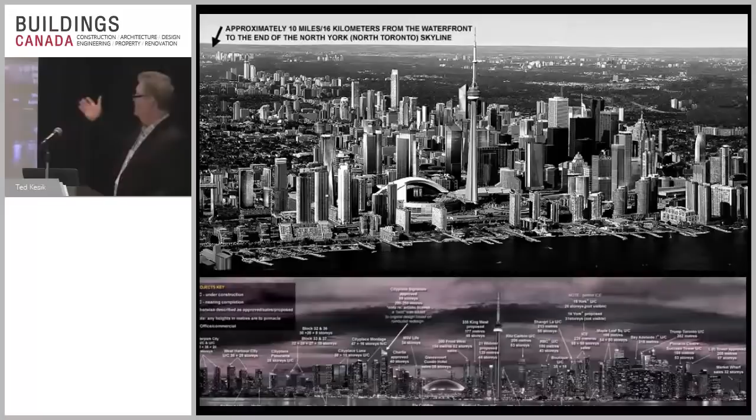Well, you know, this is Toronto, and it's starting to look like condo land. Last time I checked, about a week ago, we had officially 168 cranes on the horizon in the GTA—168 cranes, we're really, really going. You can see there's all kinds of action going on, and there's a corridor where all the activity is occurring: along the lake shore and Lake Ontario, then all the way up to North York, sort of following Yonge Street and the subway line. That's where all kinds of buildings are being built.

There's an image down below, probably not that clear, but it gives you an idea. There's a whole bunch of things that are going to change, because even more stuff is going to get jammed in there, to the point where there won't be any daylight penetration from one place to another. It won't even matter that you have a glass condo because you'll be shadowed all the time. They discovered the same phenomenon in Hong Kong—they ended up saying, gee, nice building, too bad we don't have a view except of another building, and too bad we don't get any sunlight in here. But other than that, it's okay. So somehow they say it's okay to do this, and it's desirable, and we'll see.

I don't think I will, because I don't think most of us—well, some of you in the room will live long enough to see this—but it'll take about 30 or 40 years for the chickens to come home to roost completely. Then we'll discover whether it was a good thing or not.

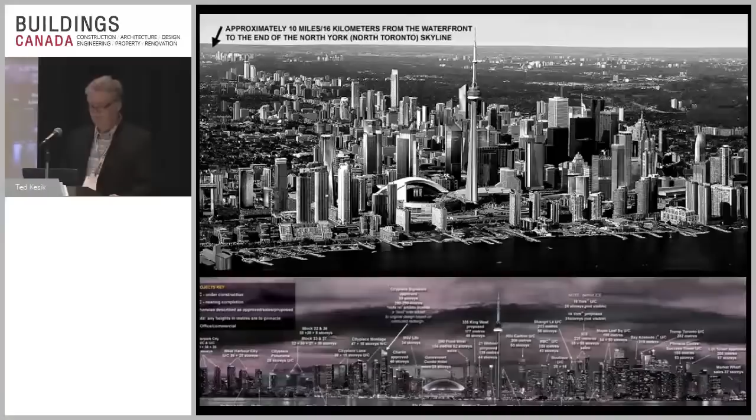So these condominium buildings come in all shapes and forms, and they have different market sectors, and those sectors change. At the high end, buildings tend to be more mid-rise, with punched windows and solid walls, because they're selling expensive units to people with a lot of money. When you sell to people with money, they can afford good lawyers, so you have to be careful what you sell them. You don't have to worry about that when selling to someone who barely scraped together a 10% down payment on a $300,000 condo. They have no money left for even a Subway sandwich, never mind a lawyer.

So there's a difference, and they go to the low end of the common denominator. If you're building a swank glass condo tower, you'd go with a high-end curtain wall system, but 99% of the time you're going to go with a window wall system instead. Window wall systems are actually at the bottom of the pile when it comes to performance and quality. That's just something to understand about what's happening in the Toronto market, in case you're not familiar.

Why glass facade condos? Everybody always asks me that question because I've been studying these things probably more than anybody from a certain perspective. So what's the scoop? I think this picture takes a sort of quasi-humorous perspective on why.

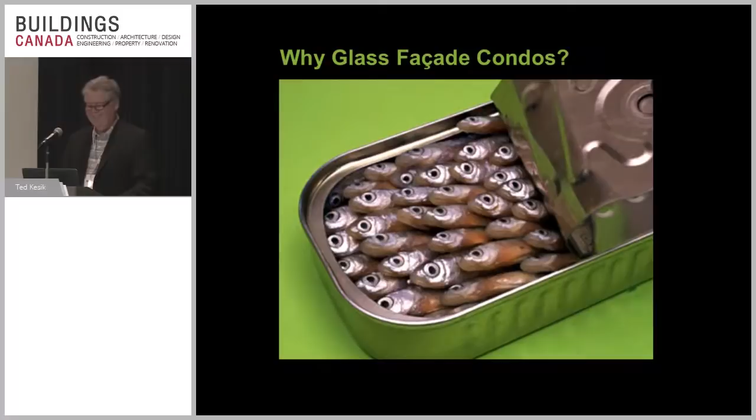Let me tell you some of the things, okay? It's called Condonomics 101, just so you know. This is stuff I've studied because I've been researching housing since I was a graduate student in the 90s, so it's been a long time. But there's interesting things a lot of people don't know. The average size of apartments in Toronto has decreased by about a third since the 1960s.

They're small now. In an old building built in the 1960s, when I was a graduate student and came to Toronto, I rented a one-bedroom apartment. It was 950 square feet, one bedroom. I couldn't furnish it, I didn't have enough money. It took me two years to furnish that thing, mostly from junk I was picking up off the curb. It was giant, I'm telling you, I could almost play tennis in the living room. They've been shrinking ever since, just so you know.

Condominium apartment sizes have been steadily decreasing since the 1990s. When they first came out with condos in the late 70s, early 80s in Toronto, they were actually high-end apartment buildings, and they were big, because developers were worried they wouldn't sell unless they made them big, with three bedrooms, extra space, and lots of closets. Well, they discovered after that they could get away with a lot of stuff.

The floor-to-ceiling glass enhances the perception of spaciousness and daylighting. So when you have small apartments and have to give them the look of being big, the glass helps, because when you're viewing it, you come in to look and go, oh, look at that. It's one of those things, it's the old trick that's been played.

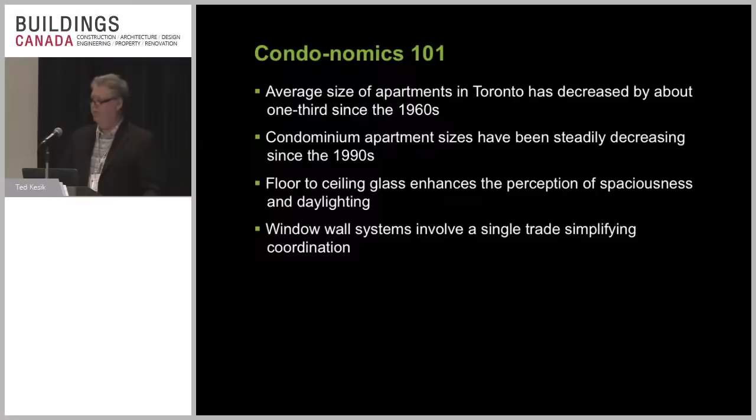Window wall systems involve a single trade, simplifying coordination. Imagine that, you have one throat to choke if you're the developer. You hire this guy and say, you're doing the whole enclosure. He says, you mean you want this whole thing done in my crappy window wall system? And you say, yeah, that's what I want, and cheap too, and fast, really fast. And he says, okay, I'll do it. And you have no competition, no other trade's going to get in your way, it's all yours, you just start and go. So now you understand why they picked the system, eh?

Window walls cost much less than curtain walls or punched window systems. It's true, curtain walls are engineered systems. Punched windows mean you have to have some kind of solid wall, which means you have to use a mason or precast, involving other trades, and coordination costs more money. So again, that's the other thing.

And then the developer, under the rules in Ontario, Tarion, only has to warranty window walls against water leakage for 2 years. Imagine getting a warranty for only 2 years on your enclosure against water leakage. That's the strong teeth that Tarion has on warranties in the province of Ontario. That's the protection they're giving consumers, a whole 2 years against water leakage. Like, wow, you know what I mean?

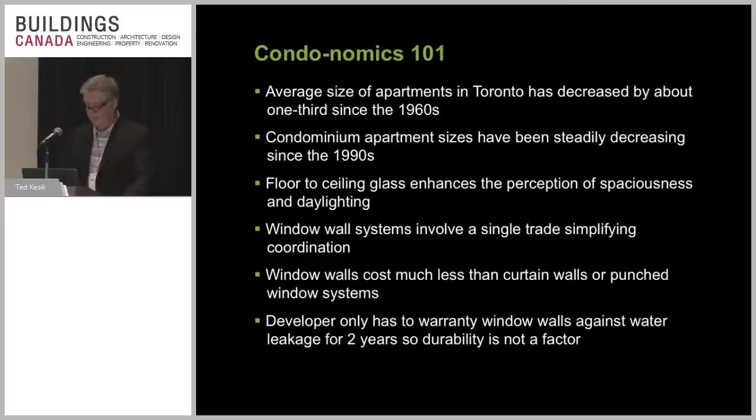That's like saying to somebody, listen, that pair of socks I'm selling you—if between the first day you put them on and the first day you launder them they happen to wear out and you get a hole, they're not warranted. Sorry, that's all the time we're giving you on those socks. One wearing and that's it, you throw them out, okay? So we're giving you that kind of level of protection. A lot of people don't want to hear this stuff, but I tell them it's for your own good.

Now, the MURB formula has been going on forever, okay? My good friends at RDH Engineering in BC, we've always talked about this because I've studied these things and they've studied these things, and it's the same old formula. I just have to explain what the MURB formula works like.

Basically, we've been building these things the same since the late 1950s. The technology fundamentally has not changed. You've got a building with a corridor down the middle—what they call a double-loaded corridor, with doors on each side. The suites are on one side or the other. There's no cross-ventilation and no daylight penetration from the other side unless you have a corner suite. Do you understand what I'm talking about?

You pump fresh air into the hallway and hope—you draw arrows of hope—that the air will find its way underneath the space of the door connecting the suite to the hallway. That is your fresh air supply. And you have this continuous exhaust fan in the bathroom sucking air out. Unfortunately, most of the air isn't coming from the hallway—it's coming through the building enclosure because it's so leaky, because it's a cheap window wall system. So it's not working the way the drawings show.

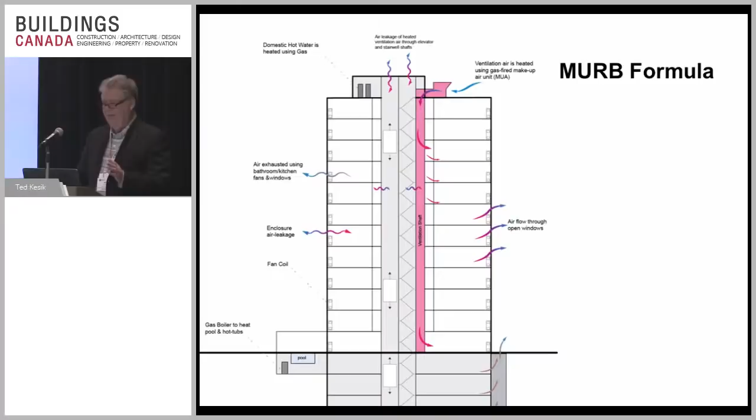You pay all that money for a building permit and nobody requires that you measure them. So this is the thing we've been building forever. They're made out of concrete, and fortunately not much happens in the way of fires, so that's good—but it's bad. I mean, bad is really a mild term.

So the way these things work: you've got double-loaded corridors with poor daylighting and natural ventilation. Shear walls act as demising walls, so there's no adaptability. The cheapest way to build these things is to just use all the walls that separate the suites as your shear walls, because that way you have a cheap structure—basically like a bunch of orange crates all put together in reinforced concrete. But at the same time, you can't move these walls. If you had a column-and-capital old-style building, you'd have a block wall in between the suites.

Well, heaven forbid—if I'm only selling this condo for $550 to $600 a square foot, I can't afford to have a mason put a block wall in between two suites. No, that's way too much money, I'm not making enough money. Okay, fine, so don't do it that way. Then that means everything you see is the way it is, unless you want to get x-rays of the rebar in the shear wall to see, can I cut through, can I make it? The adaptability issues are insane. But it's the cheapest way to form and pour because it's the same cookie-cutter floor after floor after floor.

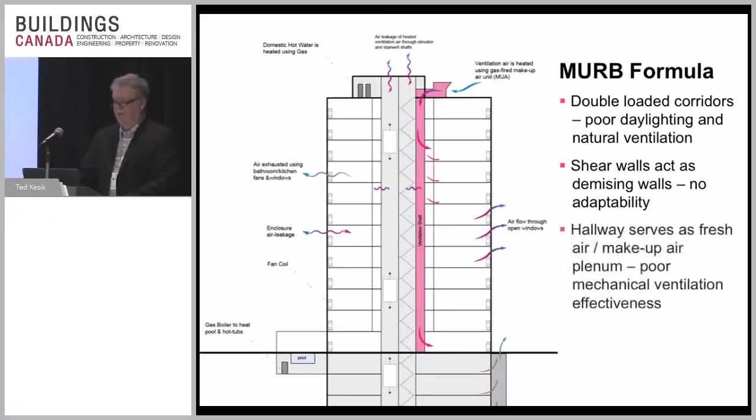Hallway serves as fresh air, makeup air, plenum - poor mechanical ventilation effectiveness, for sure. People constantly complain of indoor air quality problems. Inefficient enclosure with projecting balcony slabs means poor thermal comfort and resilience. And that's the real issue, because that's what happens. So now you've got all of these issues coming together, and it's not so good.

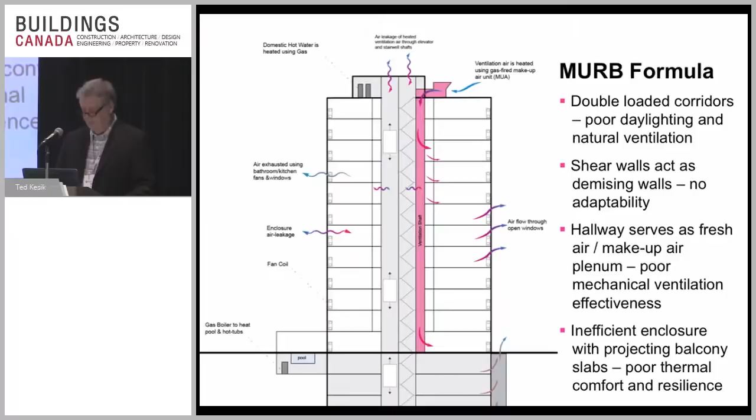So if you want to know why condonomics 101 works, I still think this sort of says it all: follow the money. That's this guy's line on Murdoch Mysteries - follow the money. It's the cheapest thing you can get away with, the most minimum of minimums. It's like someone who asks what's the passing grade, and they go, you need 50% to pass, and they get 50.01%, and they say, that's it. You sit there and think, you're going to be my brain surgeon with 50.01%? I'm really excited. Okay, so let's talk about glass condo performance problems.

Durability, of course, is huge. Water and air leakage problems are widely reported, and we already know - there's things I can't even talk about because my colleagues tell me I'd be violating client privilege, and there's people suing people, it's crazy already. And these buildings, in some cases, haven't even hit the 5-year mark. So there's deterioration of interior finishes, propagation of mold - not good.

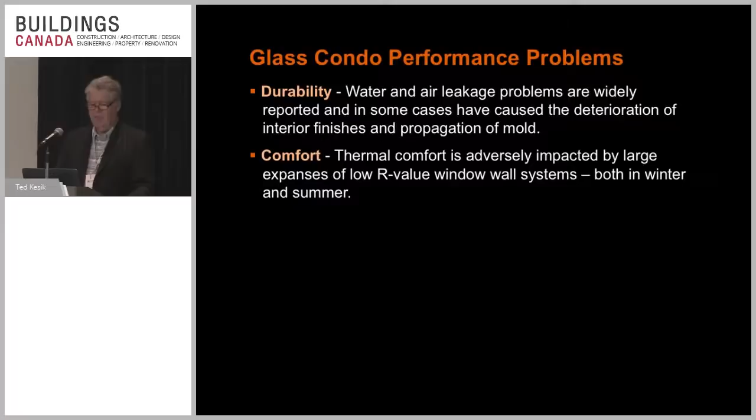Comfort - people have a really hard time gaining comfort in many of the suites, both in winter and summer. In winter, too cold - you're looking at an R2 enclosure. An R2 enclosure is like being inside of two cardboard boxes as a street person. I'm serious, I always tell people, do the calculation. It's R2 - that's between you and the outside world.

Toronto, February, minus 30, R2, and you've got this conductive slab going across the building - you can put a case of beer on it and pre-chill it. And people say, why don't you just put it out on the balcony? You say, because if you fall asleep watching the Leafs, the beer might freeze, and then you've lost on two counts. So you've got to understand.

I have this sense of humor because I was one of those people that was fortunate - I grew up in the cultural metropolis of Sudbury, Ontario, and we saw hockey through a different lens, and beer especially.

So the comfort issue is huge. In summertime, you just can't maintain comfort either, because the glass expanses are too big for the cooling. They put the same fan coil unit in every suite - it's one of those things, you get the same as everybody else, you know what I mean?

But sometimes you have a corner suite that's got a lot of glass, facing west. They don't - people say, what's going on, I'm just running this thing 24/7, it's hot in here. This is common. I know I've talked to people who have rented these, and they always said, boy am I glad I just rented this place for a few months while figuring out where to live in Toronto, because I would never ever buy this thing - it's just a disaster.

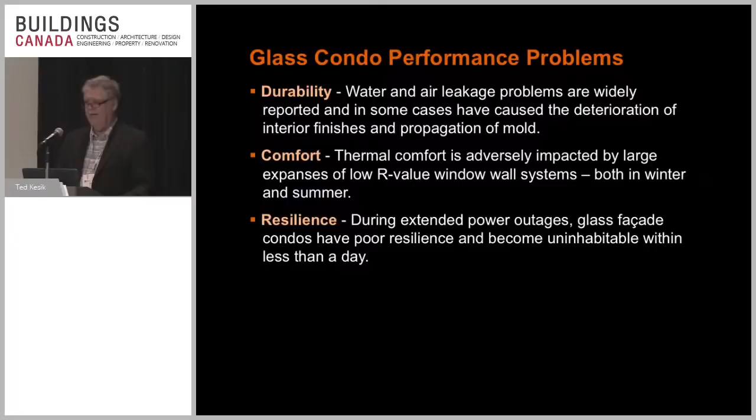Window wall enclosures are prone to leaks.

It's true. This is a typical example of how these things are put together. You look at this thing, you show this to somebody, say this is how your building is being put together. You look at all the fingerprints, the scratches, the imperfections, the undulation of the concrete, the lack of a good seal. The whole thing is just garbage. For the money you're paying, for that kind of money per square foot, you should get something that performs like a Ferrari. But no, you're getting something that's like a Pinto, a rusty old Pinto.

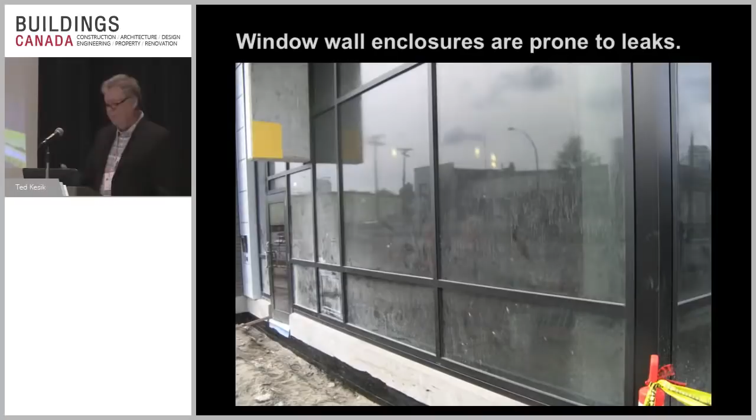These things are bad, they're prone to leaks. They've been known for that forever because they were developed really as a storefront application, one story, not to handle big pressures back and forth. They were never designed for that, and not for huge expanses, endlessly expanding and contracting. They weren't meant for that. But somebody said, you know, we could adapt them for that. It's true, you can. So the workmanship, materials, and installation conditions are imperfect.

In the 1960s, architecture was amongst the top 2 paying professions in Canada. But now they've fallen to the point where I don't know where you stand. Engineers haven't done much better. There's a development industry that's intent on beating the hell out of us and getting us to compete against each other, to the point where we've narrowed our fees down so the only way you're going to make money is if you can trick a guy into giving him the same set of plans twice and invoicing him, and then later he discovers he only built one building. That's about the only way you're going to make money nowadays.

People joke, but I tell them that because a lot of times I have friends, I go to parties, people say, well, you teach in an architecture school. I say, yeah, I do, but I try to warn the students to run while they still can. This is not a business for you, it's different. I always ask, did you marry rich? Some say yes. I say, okay, good, then it'll be a nice hobby. Do you come from a rich family? Some say yes. I say, well, that's good, because then you'll have lots of people you can design for, it'll give you something to do, and you won't turn into an alcoholic popping pills. A lot of rich people fall into these things, they have too much time on their hands. So in that sense, it's very nice, it's like painting, it's like taking a degree, it gives you something to do. But if you're talking about somebody making a viable existence, with a wife and kids, 3 or 4 kids, putting them through university, you're going to have your kids awfully old in life, and it's going to be tough. So I'm just realistic, and it shouldn't be like that because it's different in other parts of the world.

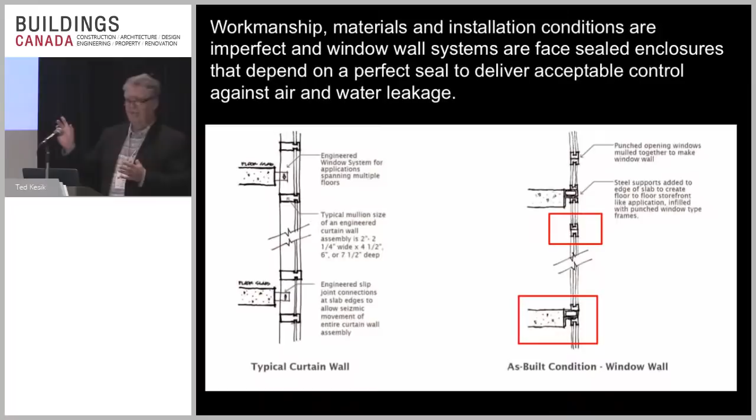So then look at this one on the side. Somebody got the idea to make these things work because they said, well, we'll take the storefront type windows, which are really windows for punched openings, and then we'll mull them together. That's what mullions do, they mull together windows, that's really the thinking. And then they end up putting this little angle affair, which is great for thermal bridging, by the way, at the edge. These are pictures that my students gave me.

I say to my students, if you have any good pictures, bring them in about condo enclosures. And look at that, the frost penetration on the inside, and already mold on it. So this is what we're talking about. And these are supposed to be fairly high standard condos. But why is there so much frost on the inside in Toronto? Because it's a big thermal bridge, that's why.

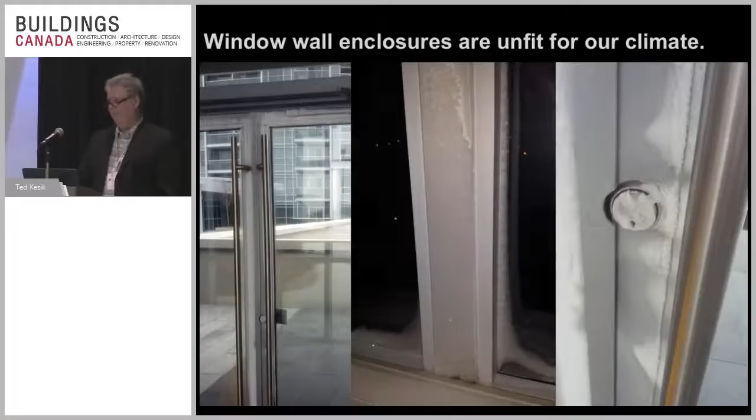Then I have my colleague in Ottawa who is doing a major study. They went to all kinds of new condominiums in the Ottawa area, and they're still in the process of analyzing. He said, I'll just give you some of the findings. He says the condensation problems are huge. He says these people gave us permission to go into their suites, we got to take pictures, we got to document things. So there's so much evidence here, it's to the point where it's sad.

It's sad because, okay fine, I've always made the joke to people that we'll just get good at building condos when we no longer build them anymore, because we'll have filled out all the lots with the crappy ones and there's no land to build on after. So then we'll know how. We'll be wise after the event. I don't know if that's the way to be.

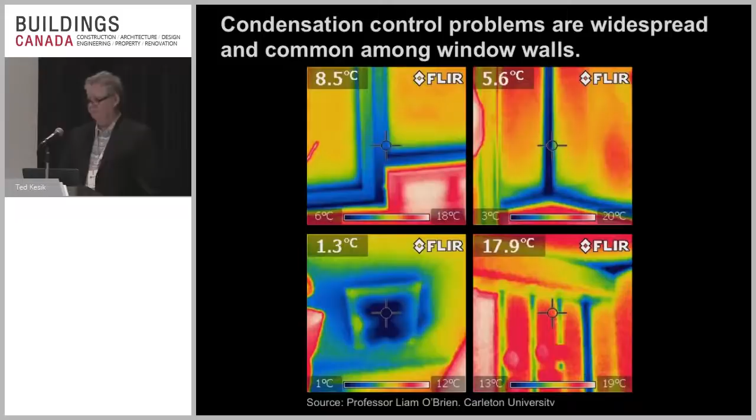And these, none of these are, if you think these have thermal breaks at the detail, I want to see the detail. I want to see it. I want to go there and get some thermography right on that detail in the middle of it, I want to see how it glows. Because I always tell people, just because you call something a thermal break, it doesn't mean that it's a thermal break. Just because you put it, you might as well put on the side of your enclosure details,

'weatherproof, air leakage proof, water leakage proof enclosure assembly.' And it's like, just because you write that, do you think Mother Nature is going to say, oh okay, I won't go in there, I will not leak into your... I'm sorry, I didn't know that, I apologize for being so nasty all these years.

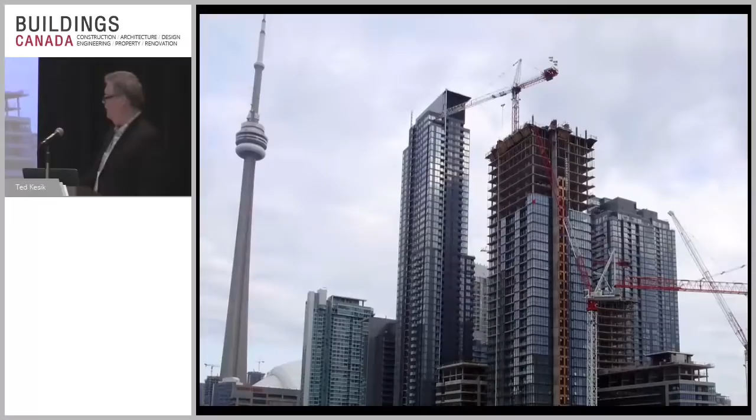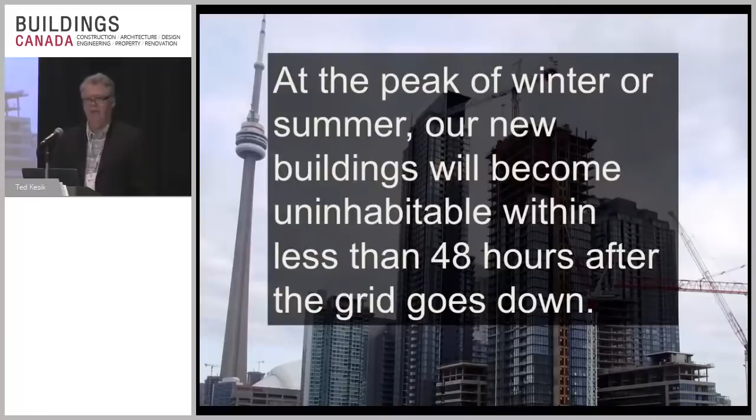Less than 48 hours, you're out. Now, colleagues of mine in New York City, where they have the same issues—it's funny how all this area of the American Northeast, Canadian Great Lakes, same thing, same climate. Look what happens: when you have a high-performance enclosure, you go almost 7 days. This was all stuff that they had monitored and also did some simulation on.

And it's a beautiful piece called 'Baby, It's Cold Inside,' from the Urban Green Council of New York. And there were places, typical buildings, where by the end of day 2 they were already having to leave. People said, I can't stay here, it's too cold, but I don't know where I'm going to go. That's the problem—when you have a city the size of New York, evacuating a city like that or trying to find a place for somebody to stay warm is difficult.

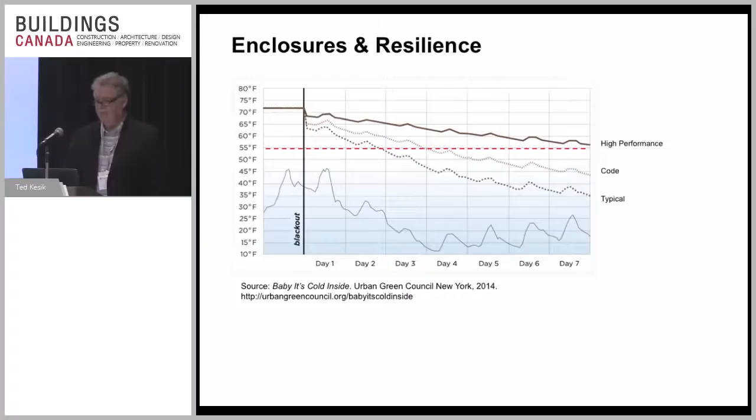It's one thing when you have a town of 500, you got to maybe put 200 or 300 people up here and there. You got 20 million people, what do you do? You know what I mean? It's tough. And so that's a big problem that we have, because climate change is going to make for worse things yet, and our building stock is not resilient. So we need to change the game, obviously.

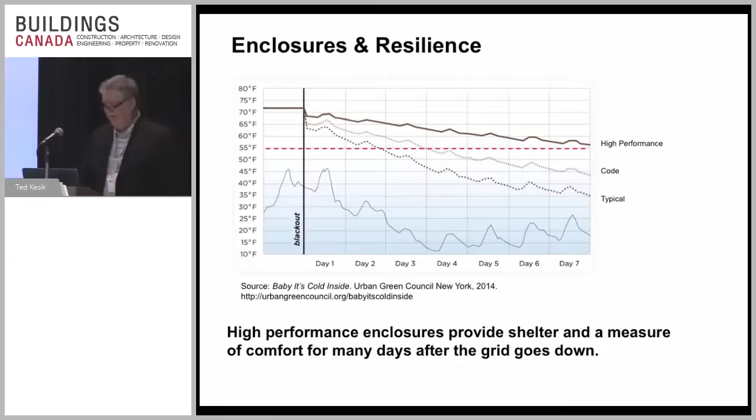But how do you do that when the building code is like that? Anyway, I want to talk to you about the pathology of window wall enclosures, because whether people put a thermal break on the edge of the slab now or not, there are other issues that deal with leakage. I have colleagues of mine who are professionals in the building science field, enclosure and cladding engineers, and they're involved in situations—I can't speak of specific buildings—that are leaking today and aren't that old. So I want to tell you how it more or less goes, the pathology.

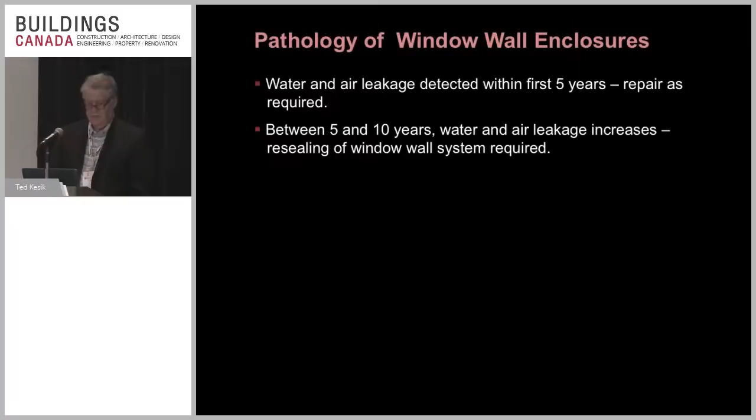Water and air leakage is usually detected within the first 5 years, and it's on a repair-as-required basis. This is the pathology: between 5 and 10 years, water and air leakage increases, and resealing of the window wall system is usually required. At that point, you're usually looking at going back to the condominium owners saying we need some money—a special assessment.

By year 20 to 25, UV degradation and thermal cycling requires major retrofit or replacement. We haven't got to that yet, but that's coming - you'll be hearing about that later today. People aren't studying this because they've got nothing better to do with their time. They're studying it because they know it's coming: these building enclosures are going to have to get major retrofits or replacements. We're trying to figure out ways of doing that, starting to think about it now, because that's one of the things engineers try to do - be proactive.

Major retrofit has a 10 to 15 year service life, just so you know. That's about as far as it gets because it's a face sealed system. And replacement system service life will depend on quality of technology and workmanship - that's another issue. Depends who did it, how well they did it.

So compared to curtain walls and punched window enclosures, it's a significantly higher life cycle cost. But nobody knows that when they're buying buildings, because we don't educate people about what to look for when they're buying a condo. We really don't as a society. We tell them more about what they need to know to buy a fridge, a stove, a television, or a car, but not about condos.

Because the condo industry, in fact the entire development industry, in fact engineers and architects, myself included, don't spend enough time doing public education about the importance of building infrastructure in our society and how to look for value. And we have ourselves to blame.

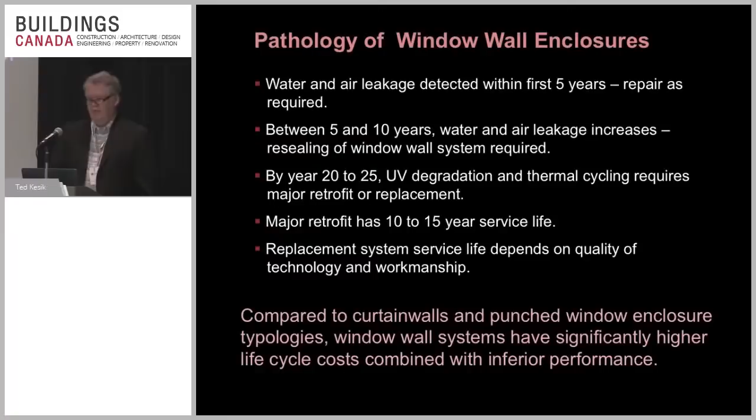We don't want to talk about all of this. It's uncomfortable. Makes us feel like, well, what are you doing? What kind of ethical approach do you have? Well, I'm part of this industry. So people always say, oh, you're crapping on everybody. Well, you know what, I'm crapping on myself too. You think I feel good about this? That's why I come here and talk about these things - I'm trying to raise awareness so people understand that if we keep going like this, Toronto's going to be a horrible place, especially downtown.

So this is one of the things I just want you to understand - these things go together in all different ways. And if you see them, I've watched these things go up. I've seen guys properly seat it with a good stiff kick of the old heel of the construction boot. Real technique we're talking, eh? Workmanship, like good old-fashioned workmanship. And all of these things have to be sealed.

This is what building science teaches you. It's odd, so look at what it says here: if a baseball player who hits .350 gets paid millions of dollars a year, what can we expect the batting average to be for a construction worker paid tens of thousands of dollars a year? You pay a guy $5-6 million a year, he gets on base 35% of the time. Hire a structural engineer with a 35% batting average...

65% of his buildings collapse - would you use his services? But you pay millions to a guy, and now you go to a guy you're paying $70,000, $80,000 a year and say every seal will be perfect, you're going to bat 1,000? Like, you're dreaming. You have to design systems that are forgiving. You have to pick technologies that defy bad workmanship and imperfect materials. That's what redundancy is all about.

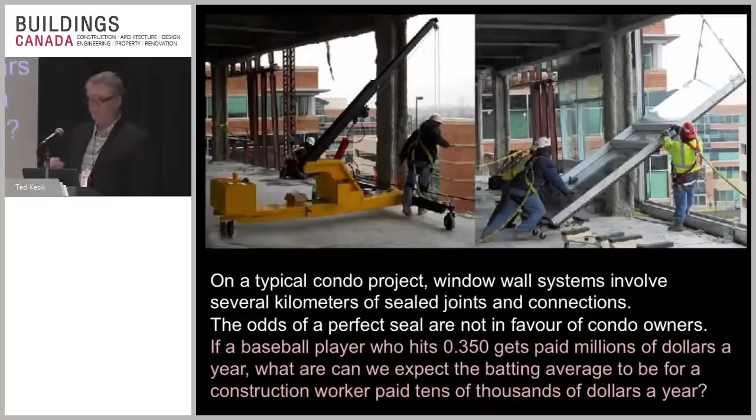So there are better systems, there are better ways to go. But this is just courting disaster, because the odds of you getting a perfect seal - if all you had to do was one suite, and that was the whole condo project, you could probably perfectly seal that one. But you're not going to do the whole thing.

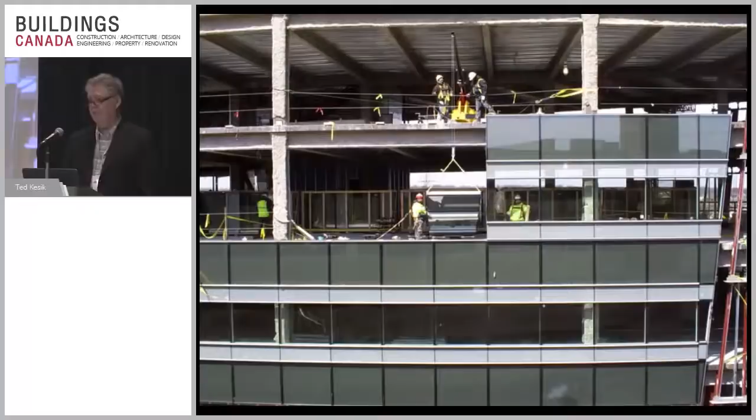And they go up fast - that's the other thing a lot of people don't realize. You go on a project, you see how fast this stuff flies up, and I don't know if they're checking everything perfectly. I know one thing for sure, they're not testing the tightness as they go. There's no quality assurance on site.

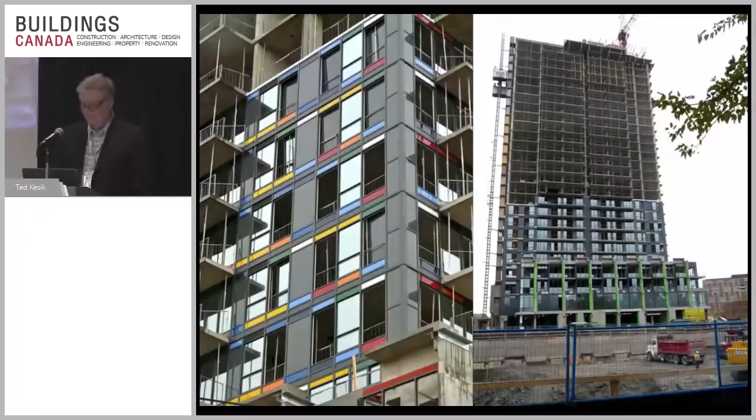These things fly. And then some of the details - when I talk to my colleagues I always say to them, I need something that's like... and the guy says, well, here's one. You look at this detail, how that thing wraps around. You tell me, long term, how you're going to go in there and reseal that when the seal fails. You can't even get at it. I don't even know how you can install it properly. Who thought of this?

They don't care, slap it up, put lots of goop. It's only a 2-year warranty. After that, it's over, don't worry about it. We're gone, we're on to another project. And so it goes. And boy, it's not going to look good in a while, because these things, once they start to leak, look shabby on the inside too.

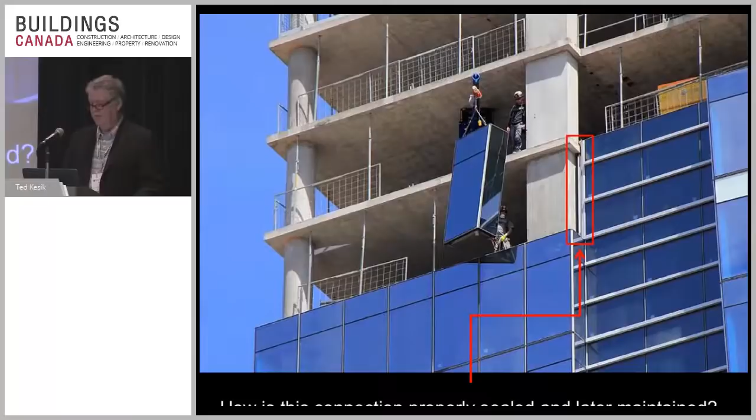So that's my question: how do you seal several kilometers of joints perfectly? That's what happens when you pick window wall. Even if you could get a window wall system that had superior thermal performance, the air and water leakage would still get you.

You have to understand, it's an odds thing. It's not more sophisticated than that.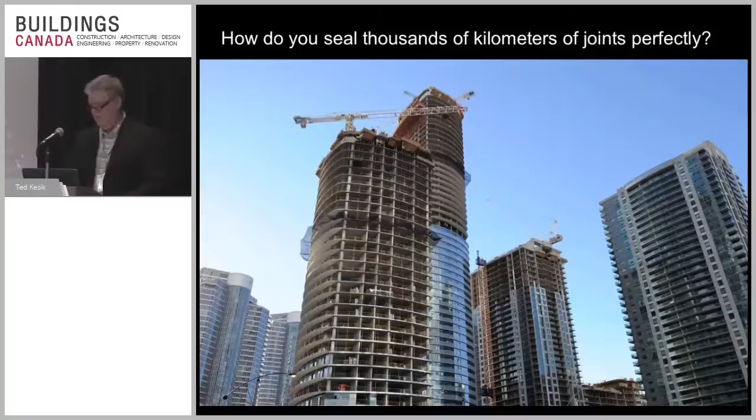So what are the life cycle implications? Well, you can see that all glass buildings are there, and they have big problems after somewhere in the 10 to 20 year range. Now, this is all data that's been gathered across North America, so it's at average, but it just shows you what's going on with different things: roof, elevators, windows, plumbing.

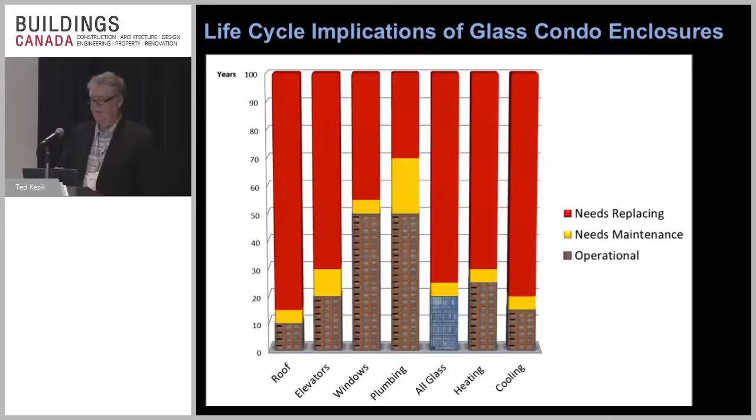Window walls are just one notch ahead of roofing, right, in terms of performance. And we've always picked bad roofing in Canada as a rule as well. We always pick cheap roofing because you can't see it. So just to give you an idea of what's going on.

So cheap enclosures are expensive. They are. You should see what happens when you have to do these.

So these are just some estimates that Lloyd Alter put together after I'd been on the CBC talking about the glass condo conundrum, because of the fact that we're going to have this issue in Toronto where we'll have taken all of the prime building locations downtown, and we're going to build all of these buildings at one time, so they're all going to become shabby at one time. And then, so I always tell people that's the future slums of Toronto. You're looking at them. Those are your districts.

That's what happens to buildings if they get run down too far and you can't do anything with them. They don't maintain their value. They end up being turned into rentals. You rent to whoever will pay the rent, and the cheaper the rent, that's the way it goes. And that's what you're filled with. That's the issue.

Why? Well, this is a very conservative estimate: the owner of a 700 square foot unit would have to pay about $50,000 to cover the cost of doing a new enclosure on their building. $50,000. And they have to move out while it's happening. I don't know what that costs on top of that.

How do you keep people in the building? How do you keep the water out of a suite on the 30th floor when you've got the whole enclosure ripped off because you're putting a new one on? Think about the logistics. I've thought about this. This is my business, this is what I do. I study the life cycle performance of buildings the way doctors study human health.

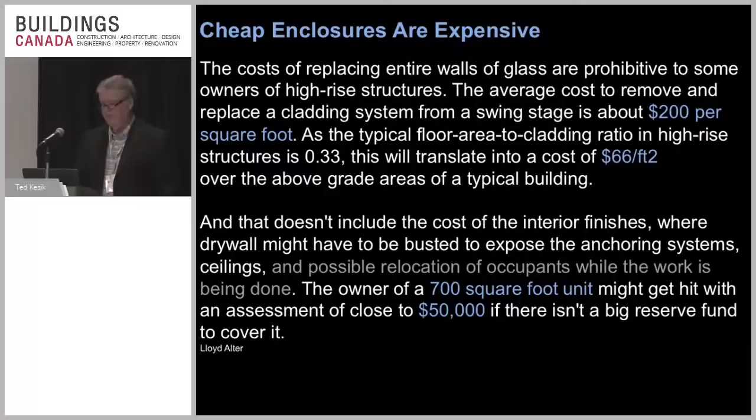So the other thing, people said, yeah, but you're forgetting about the architectural delight of all glass. So the Urban Green Council guys, they're so empirical, they always sit there and go, yeah, you can say whatever your theories are, why don't we go out and do some random observations? They went out in New York, and they did all these districts, and they just went and photographed buildings. So it's all empirical data, and it's a difference between hype and reality for sure.

So on average, 59% of window area was covered by blinds or shades. Over 75% of buildings had more than half of their window area covered by blinds or shades. And it didn't really matter what was happening, that's what they found.

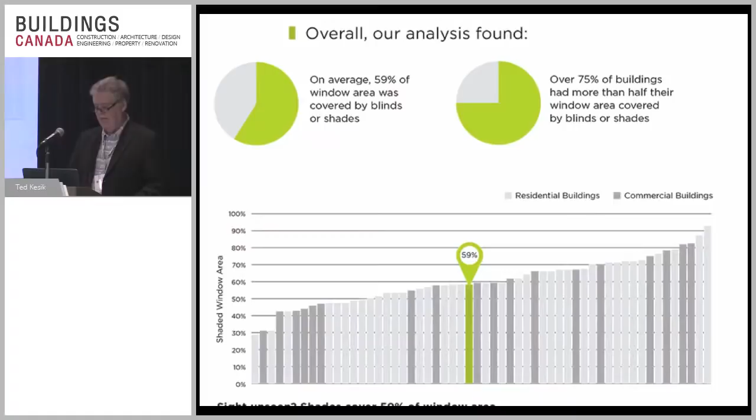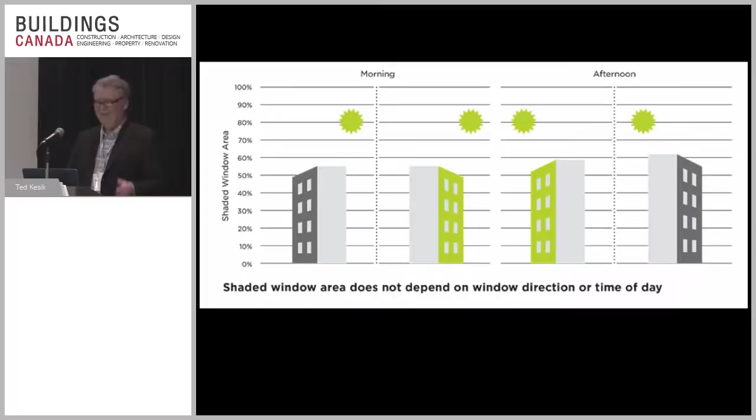Shaded window area does not depend on window direction or time of day. So you go, and there's this big thing in there, the wall, from floor up to ceiling, and glass, it's all cool. And that's what you're looking at.

At the end of the day, no one's even enjoying it, because after a while people realize, hey, I'm like a goldfish in a bowl here. Everybody's looking at me, one building beside the other. Why does everybody have those binoculars that were on sale at Canadian Tire last week? And why am I looking at a guy out of my binoculars who's looking at me out of his binoculars for? What's going on here anyway? Why did I buy this place?

So that's what they were trying to get across. They're saying it's not just costly to the tenants, but also costly to society, because one of the things that the energy modelers in this room know is that these all-glass buildings have huge peak energy demands for heating and cooling, particularly cooling. When you start adding hundreds of these buildings downtown, you're stressing the infrastructure system, and the developers are not paying for that. That's the part that really bugs me. If they paid their fair share, you'd say okay, fine. But they're not. So now every hydro user is going to have to pay to upgrade the amount of power coming into Toronto because all these buildings have huge high peaks.

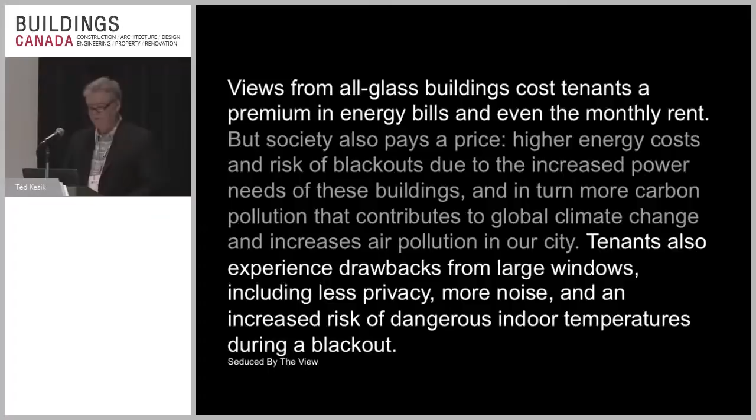So what's next? Hard to say. One thing for sure, buildings in the GTA are becoming more expensive. Right now construction costs about $210 per square foot, exclusive of land, depending how you count it. Purchase price is about $505 a square foot. These are averages, I'm sure there are ones that cost more and less. Detached housing, just to give you an idea, costs about $180 a square foot to construct, and the purchase price is $330. So it seems there's more markup on condos.

But they're not getting any cheaper, and no one is forecasting prices to drop. There's the odd person who is, but they also happen to be like standing on a corner wearing a Leafs jersey outside Maple Leaf Gardens proclaiming that the world is going to end. But I don't see the prices dropping. So there's a lot of money in the kitty, so to speak.

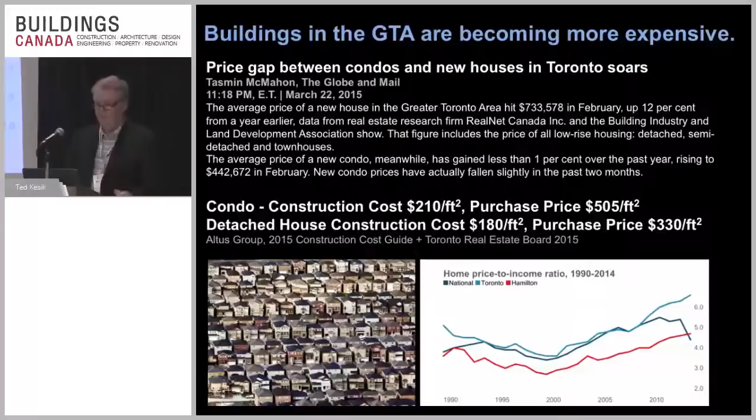Thermal breaks at balcony slab projections - very important. People say it's too much money. It's not too much money. You should ask the condominium owner. The problem is they don't know what these things are, so they don't know if they want to pay for them, because no one's told them. Imagine telling somebody in the sales office, oh yeah, your feet will be cold most of the winter when you're standing within 2 meters of the edge, like that's supposed to help sell the condo, right?

But if you go for the thermal break, we can give it to you for $100 a meter - that's the cost to install it. People say that's a lot of money. You say, well, you've only got 5 meters of balcony, that's $500. What's that on a $450,000 condo? Comfort, feet stay warm, you stand near the windows barefoot, nice. What's wrong with that? That's why you don't find that in the sales trailer - no way. They've got marble, different tiles, different types of cabinets instead.

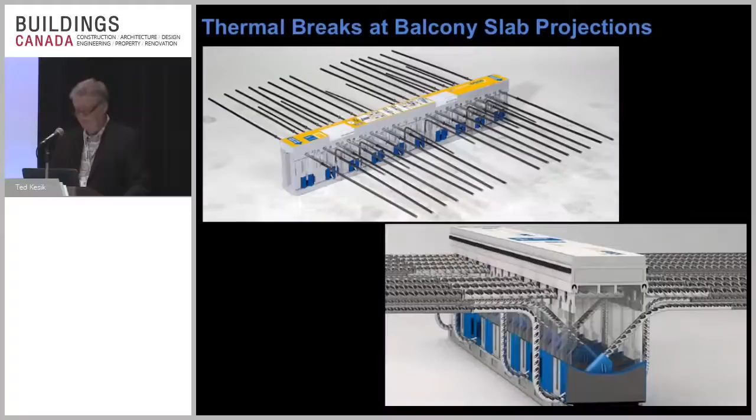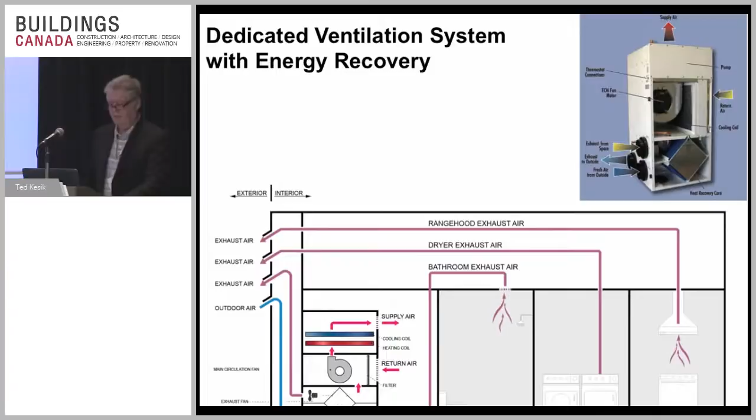Dedicated ventilation system with energy recovery - they make these units even in Canada, though most get exported to other parts of the world. We have the technology to give everybody their own ventilation system. We don't need those stupid pressurized hallways and all that issues, and we don't have to count on a leaky enclosure to bring air into our suites. We have these things, and we can eliminate the use of shear walls as demising walls to enhance the flexibility and adaptability of condos.

So we could be doing a better job, is what I'm trying to say. And none of these things are rocket science.

Now, I was doing the Toronto Green Standard a number of years ago, and we organized a very nice system where we brought together developers, contractors, cost accountants, and energy modelers. I was the guy that headed it up, and we were going to do cost effectiveness studies.

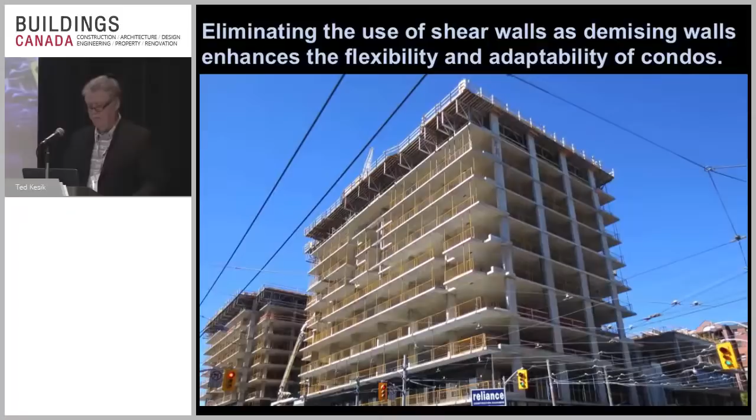This money has increased since I did that. That was back in 2008, and now it's 2015. So I had to inflate the numbers, but I'm just going to show you what happens here in terms of what I call the high-performance condo value proposition.

Cost of upgrading the enclosure in a typical condo, for the average amount of enclosure area that belongs to your condo, and the HVAC system to go to this other system, because you already have a base system. You're only talking the incremental cost to go to an ERV: $10,000. That includes the thermal breaks in the balconies, higher performance walls and windows, and a dedicated ERV.

$10,000. Typical average cost of a condo in Toronto, this was like 2 weeks ago when I put the last of this presentation together, was $443,000. I went to the mortgage calculator to see what the difference was between 443 and 453.

I have talked to friends of mine in banking. I said, that's not a deal breaker in terms of whether I'm going to get a mortgage or not. And they said, no, 10 G's on 443 is nothing. So I could be living, if somebody had told me — mind you, everyone would have had to agree — the $10,000 more per suite, I could have gone to, I'm not saying the best, but a much, much better system.

That's what's sad about the story of glass condo towers. It's not like we didn't go there because it would have meant another $250,000 per condo. No, we're talking like this — this is when you see the pettiness of the amount of money, you realize what the greed is. And also when you're looking at the people buying it, the gullibility and the total lack of sophistication about understanding building technology. It's sad, but it's just the way it is.

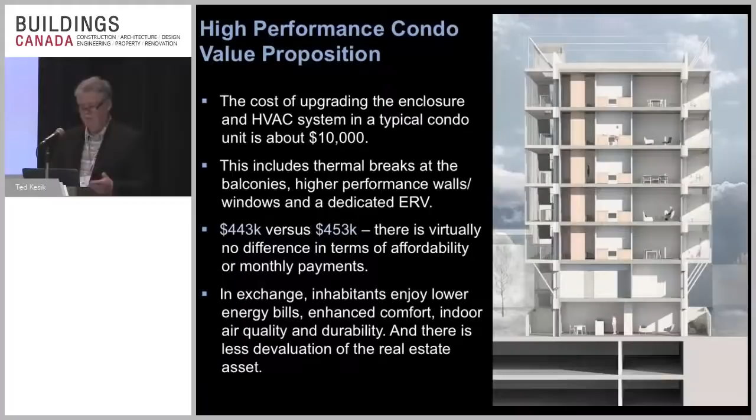And they said, well, that's probably the way we should do things. When you go to certain places in the world, like Austria, you'll discover most of their stuff is built like that. People don't mind living in there. So we can do punched windows.

And they're good. The other thing daylighting experts will tell you is after a 40% window-to-wall ratio, you don't get that much more light into a building. After that, it actually becomes excessive. So think about that, and then think about what we did in the past.

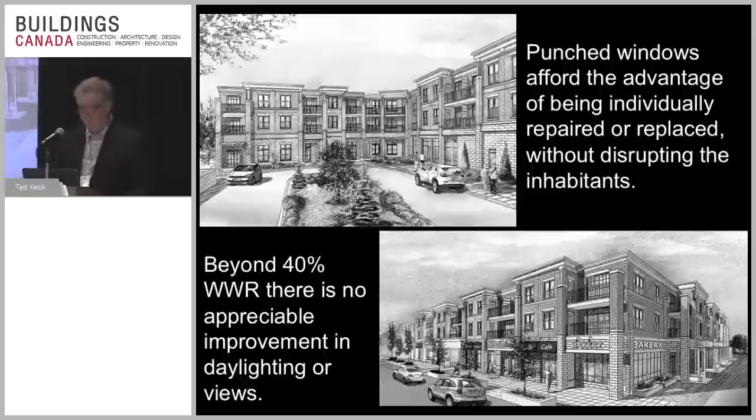And the candy lofts — people always say, what kind of a condo would you advise people to buy? I say, well, one of these: go and look for the old converted buildings, the ones that have 2 feet of masonry walls and punched windows. Because you can control your costs if there's issues with the enclosure. If there's a leaky window, it's the one window — you don't have to replace the whole system.

You've got something that's got a lot of thermal mass in it. Chances are if the heat goes down, you probably stay there for a week before the heat leaks out of everything. They're tough buildings. They have very low monthly carrying rates. I've been studying that too, because people always ask me, what would you do?

And I'm not against the condominium idea. It's just, you know, give people something that has a better value. So this is the whole life cycle thing.

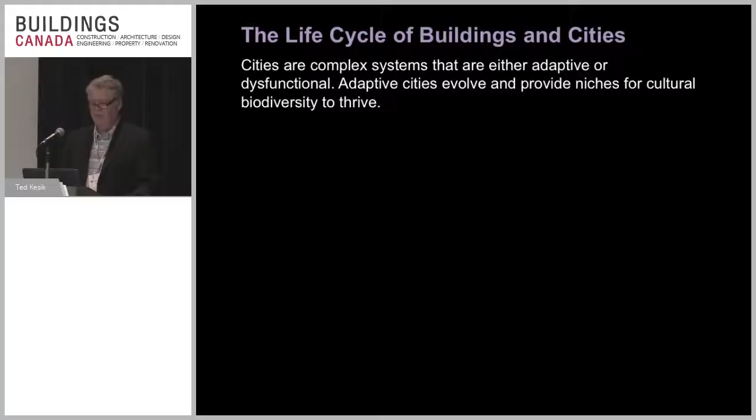Buildings, cities — you think about if you want to be a responsible developer and you want to do stuff for your city, for your community, for your country, you want to be able to build in some kind of cultural biodiversity into your building stock, right? Traditionally, what we used to do is build buildings with good bones.

Very tough buildings, adaptable, robust, and they could accommodate many cycles of change. The Candy Loft is an idea of that. There's a whole bunch of buildings in Toronto in their 3rd and 4th life in some cases. You can go look at Gooderham and Worts in the Distillery District, tough buildings over 100 years old.

They have 3-4 different uses and they're good buildings, but they got run down. The trick is to have a building that's so robust that you can run it down but then bring it back, which you can't do with the new ones unfortunately. So the robust buildings did get run down, and then this decay fosters new growth for less affluent inhabitants.

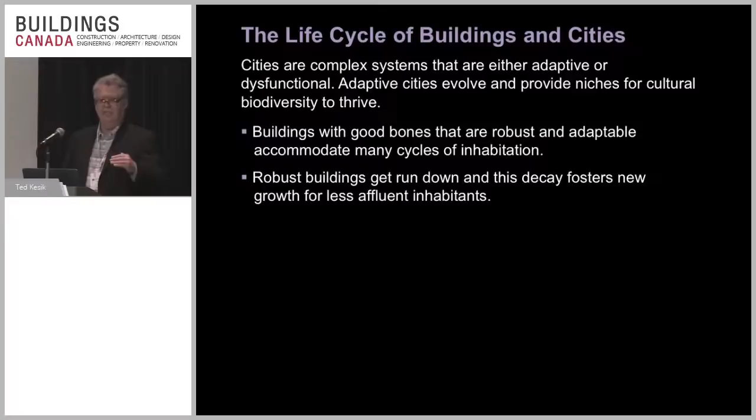That's the cycle of how cities work. You have an area that gets seedy, it gets run down, but that's good because now you have a niche in the cultural ecology where people can get in, and then eventually, as the market and demographics shift, they become rehabilitated and/or retrofit, otherwise known as gentrification.

I remember when I first came to Toronto to visit my brother, who was studying at the Royal Conservatory, it was 1972, and it was like Cabbagetown was just at the beginning of starting to become gentrified. It was the cheapest place to live, so cheap to live there. It's different today, isn't it?

It's been gentrified. So these are the natural cycles, but the buildings had good bones, and the entire cycle begins anew. That's what you want to do, be able to cycle through.

So history shows that buildings conforming to this healthy model acceptably accommodate at least 3 generations of inhabitants before needing significant restoration and rehabilitation. That's what you sort of need to shoot for. You're looking at about a 60-year life cycle.

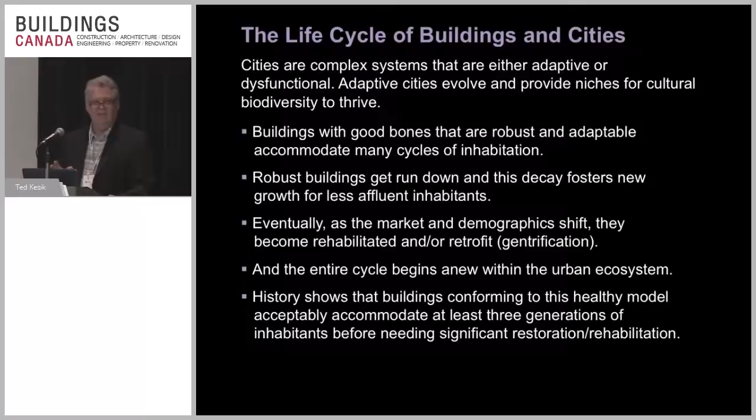A good example of that is Toronto's older high-rise tower apartment buildings. They did a full 50 to 60 years of service before they need to be retrofit. They now start to need to be retrofit, but see how well they served society for such a long period of time. So glass facade condos do not conform to this sustainable life cycle because the DNA of their form,

armature, and fabric is not sufficiently robust and adaptable. That's been my argument right from the beginning. I just tell people, I don't care what you say, I'm just telling you right now, these things are not going to have the same performance on a long-term basis, and they're not going to be a cultural asset. I won't live long enough to find out if what I'm saying is true. Most of the people that tell me I'm full of shit aren't going to live that long either.

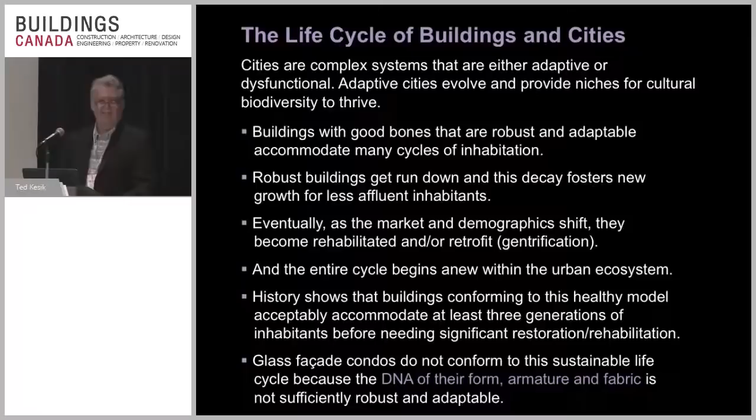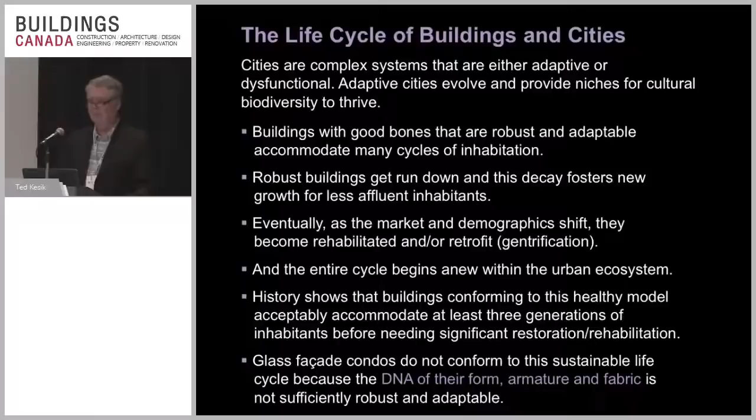So it'll be very interesting at some point in time. Somebody's either going to look and say, that guy was a complete nut basket, U of T, or they're going to say, he was so right on, it's too bad nobody listened. I don't know which it's going to be. You know, I'm not worried about that, because in a few days, I'll be up north fishing for pickerel, having a beer, and not having to worry about looking at water leakage in glass condo towers.

So the thing you have to understand then, to sustainability, which is what we're trying to get to, is about evolution. And the buildings that we have don't evolve. The new glass condo towers, they're not designed to evolve. In fact, we don't even design all the new buildings that way.

But think about this. Think about designing your building with a view that the bones are going to be solid and the armature will be there for 200 to 300 years. Designed right from day one so that the enclosure can be retrofit.

Think about that the same way that the automotive manufacturer thinks that those tires are going to wear out, and you know what? I don't want the person to take 3/4 of the car apart to change the tires. I'm going to design a system where 5 bolts, boom, boom, it's done.

You sit there and go, yeah, now that, if we know that the skin is what's going to go, and we know the structure is going to last for hundreds of years, because the HVAC systems are designed to go in and out, see? Because they know they don't last. But for some reason we think, that's it, we do the enclosure, it's going to be there for 150 years. It's not. Not unless we want to go back to the old ways of punched windows. And then, even then, we might not succeed because we don't have the buffer.